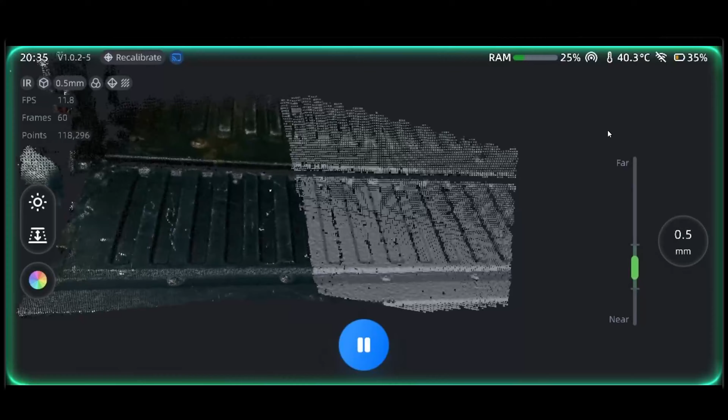Let's do a feature rundown starting with its various modes. The EinScan Rigil can be operated in different ways. Standalone wireless, great for maximum mobility and ease. Utilizing the built-in touchscreen display, you can scan, edit data, and even mesh within a certain data size limit.

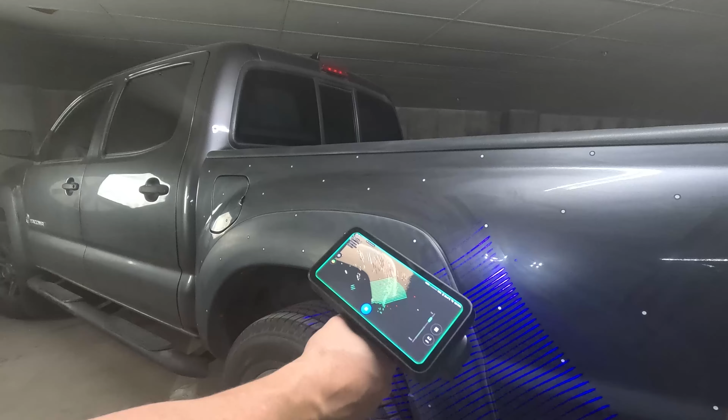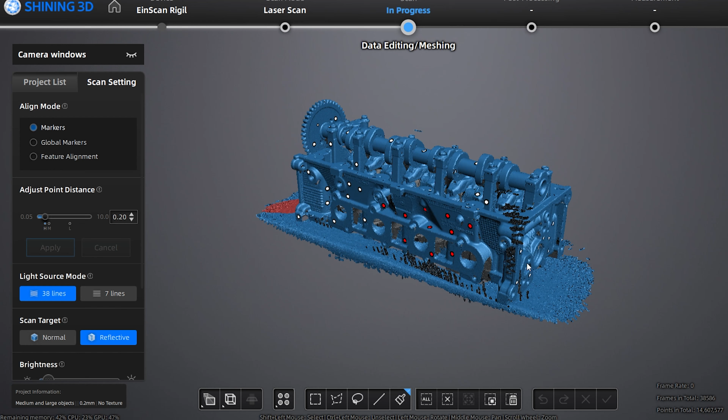For working with bigger and denser data, that's when the scanner's PC-based operation modes come in handy. Wireless PC mode is great for boosting scanning and processing power without sacrificing the freedom of wireless scanning. It leans on the computer's hardware rather than relying solely on the scanner's. In this mode, the scanner is wirelessly connected to the PC over Wi-Fi or a built-in hotspot. It also grants you access to features that aren't available in the standalone mode, such as a greater array of tools for editing data and aligning project groups together.

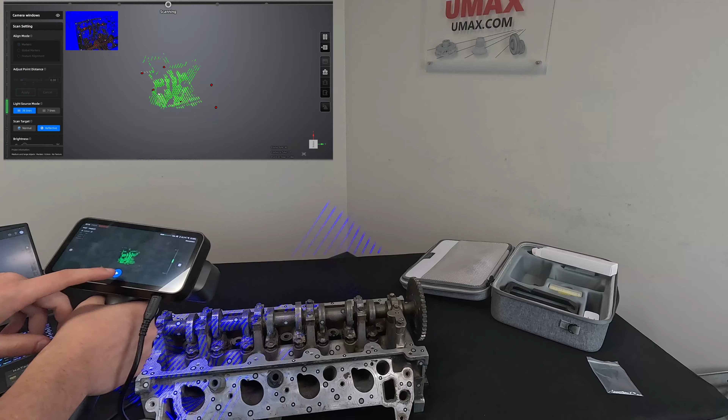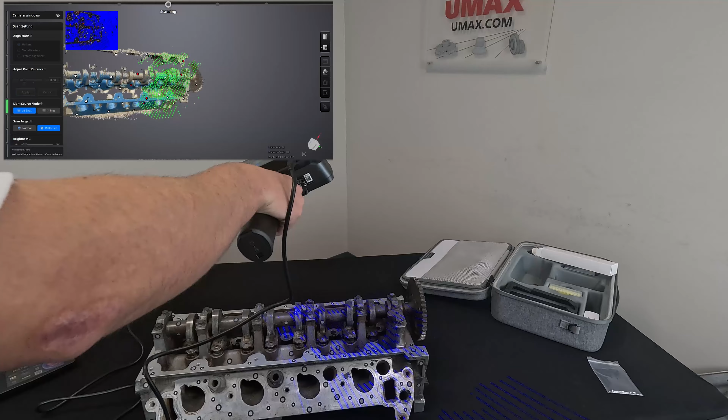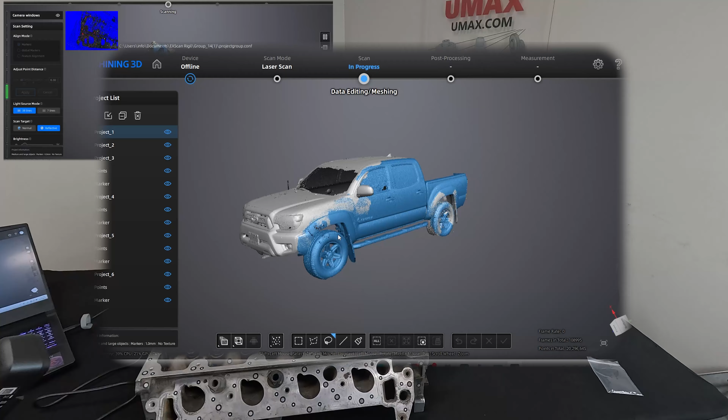Wired PC mode is much the same, but in complicated network environments or ones with high security, connecting wirelessly may not be an option. That's when the wired PC mode comes in clutch. It also boasts the highest scanning speed out of any of the other modes. Any of the scans or meshes generated can be transferred to the PC wired or wirelessly. Your projects can be further modified for alignment, data editing, meshing, post-processing, and of course exported into various file formats such as STL, OBJ, PLY, 3MF, and ASC, all within Shining 3D's included software.

More about the software ecosystem in a bit. We're not done talking about modes just yet. We also have the Rigil's scanning modes.

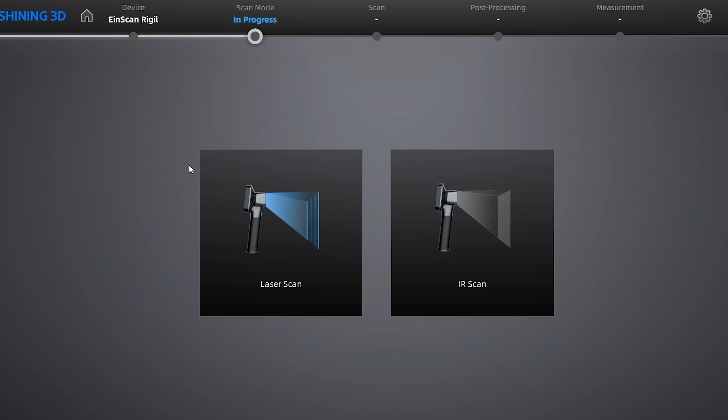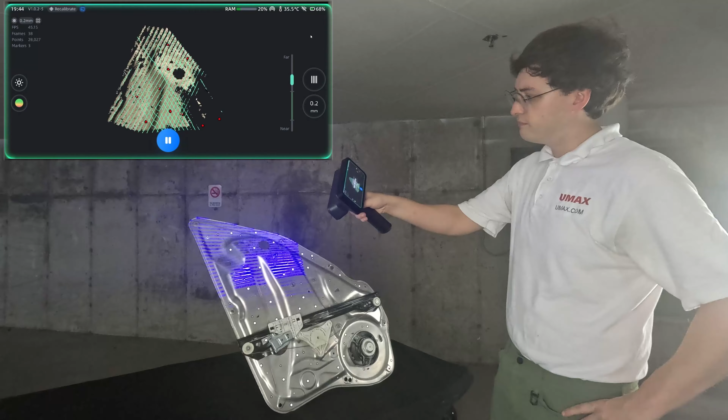As far as scanning technology goes, Rigil has both laser scanning and infrared scanning, allowing for a great degree of versatility. Laser scanning at a blazing 4.4 million points per second, up to a resolution of 0.05 millimeters, with a volumetric accuracy of 0.04 plus or minus 0.06. Even able to do so without markers while in its PC assisted mode, which is quite rare for this type of scanner. This will be your tool for when you need the best quality. It works very smoothly and quickly despite being the mode with the most intense results.

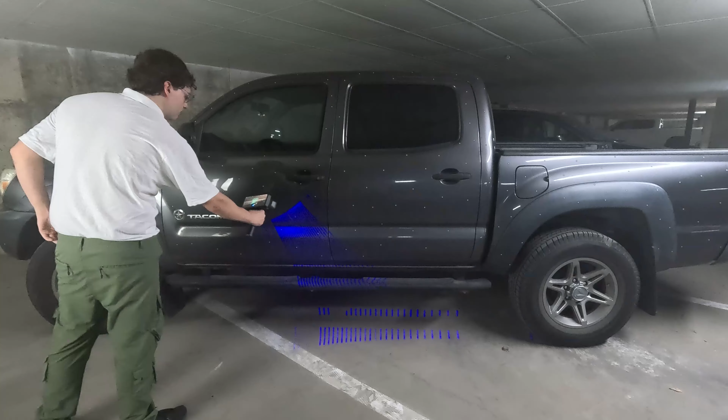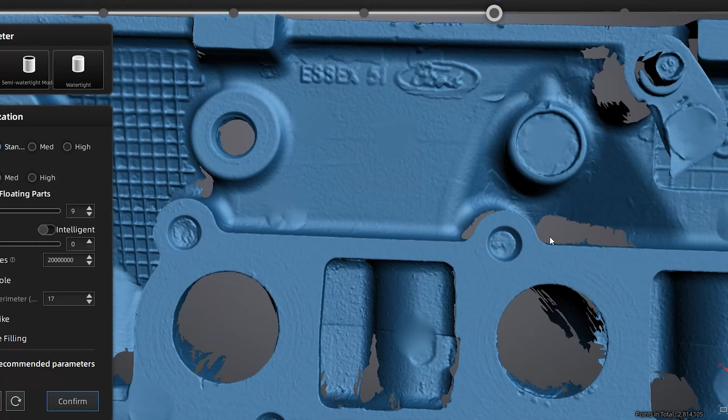It can start to slow down if scanning a very large amount of data in the wireless standalone mode, so I'd recommend splitting the project into groups and aligning them together, or using a powerful PC in tandem with the scanner for no compromises. The lasers are also great for scanning traditionally difficult to scan materials like reflective and black surfaces. I've even managed to scan the lightly tinted windows of my truck. You can also hot switch to a 7-line fine detail mode to get extremely consistent and fine results for a portion of your scan, which is very powerful.

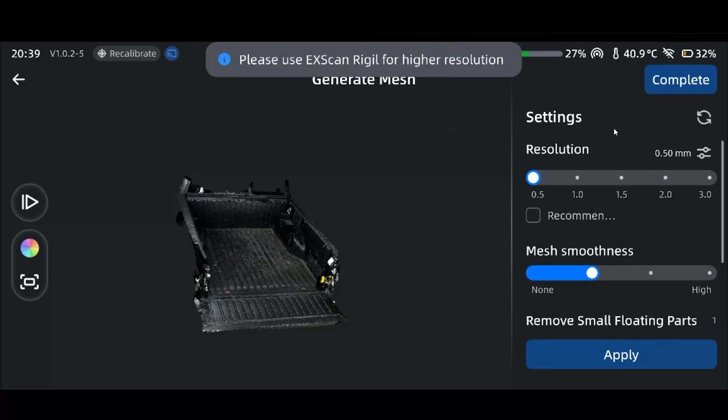So what does the IR mode have to offer if the laser mode is so powerful? Infrared scanning has many advantages over laser, even with less accuracy and points per second. It's capable of full color scanning, not only adding texture to your meshes, but it's able to use it for scanner tracking as well. If you're unfamiliar, this is the way that the scanner aligns itself within virtual space relative to your subject, giving you the capability to scan without the need for either markers or contrasting physical geometry on the subject.

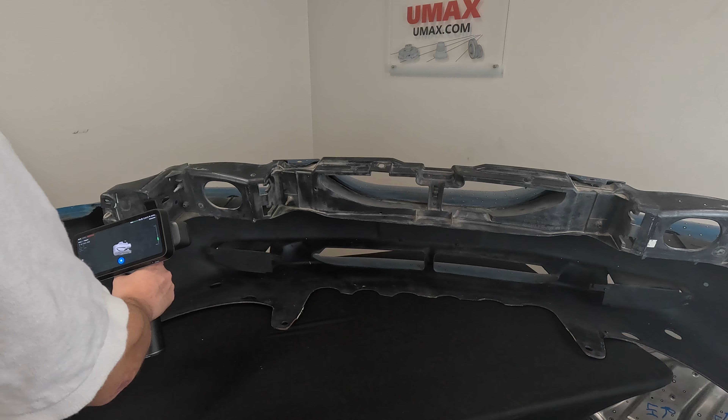This can be very useful for scanning large, smooth objects, which this mode also handles well with its wide capture. Such objects you might be scanning in an outdoor setting, in which case you'll be pleased to hear that the IR mode works great even in direct sunlight.

With IR scanning, you get the option to set the scanner into a portrait mode for optimized scanning of human subjects. Scanning humans can be quite difficult for the subject and the operator because of all the small movements humans tend to make even when they're trying to stay still.

Having a scanner that can get areas done quickly and completely is essential. The Rigil is fast as lightning, and its processing algorithm is great for dealing with small discrepancies and making appropriate corrections.

So what's it like to actually use the scanner? Let's talk a little bit about the user experience. The scanner is very light, it's well balanced, and even after long scanning sessions, my arm doesn't get tired like it does for other heavier scanners. The screen is bright with many adjustable settings, built-in update handling, and a personal hotspot for connecting screens or PCs wirelessly.

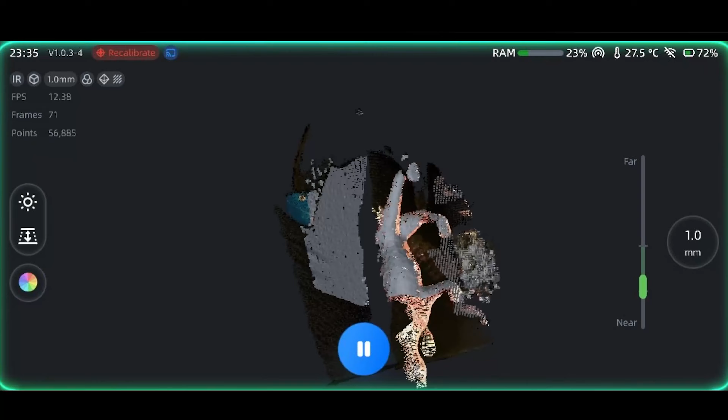3D scanner tracking technology has gotten a lot better over the years, with scanners becoming consistently easier and easier to use, and the Rigil feels like a culmination of that. Sharp angles and quick movements are no problem for a scanner that has a good field of view and an excellent frame rate. There simply aren't a lot of objects this scanner will have difficulty with.

Shining 3D's software environment provides many easy-to-use tools to skip the hassle and tedium that can sometimes accompany the scanning pipeline. Small and large mistakes can be undone without careful data editing or restarting the scan.

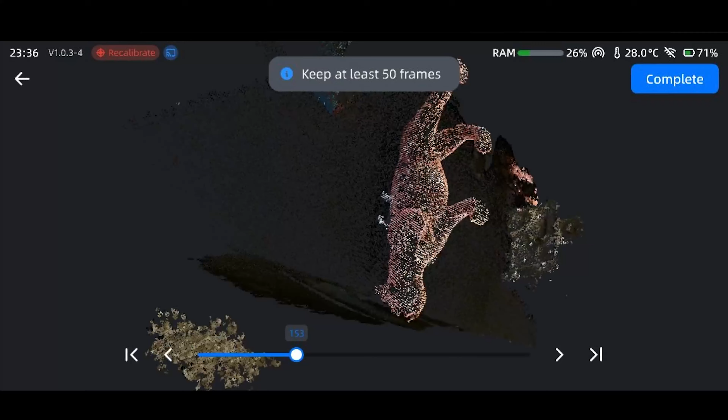By scrubbing through time, you can revert the scan to any previous point. Data editing itself is quick and easy, with small details like a zoomed-in view of the lasso drawing, and connected domain, which lets you select entire connected sections of data instantly. The grouped-based project structure also makes composite scans effortless, and is great for bypassing hardware limitations.

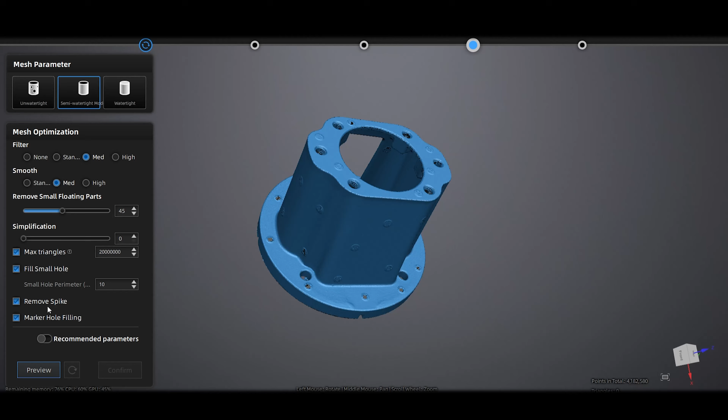After scanning, you'll have access to many different meshing options for simplifying and refinement, with plenty of post-processing tools to further perfect your mesh before export. It even has some measurement tools. Simply put, the software is loaded with features.

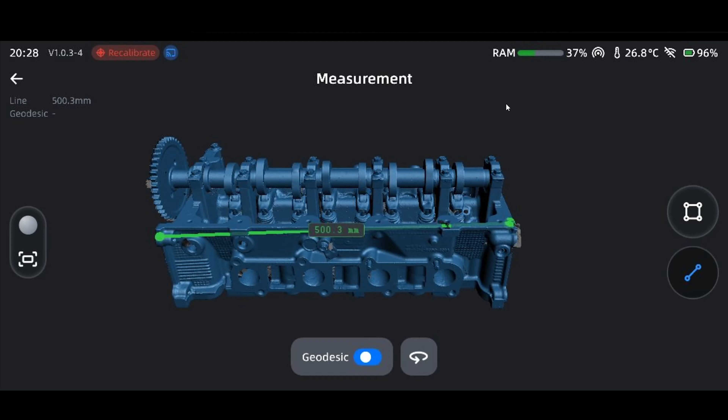I think that 3D scanners can generally be split into three categories: hobbyist scanners, professional level scanners, and metrology grade scanners. I'd put the Rigil right in the middle. Let's compare it to the HX2, a much more expensive scanner, nearly at double the price at time of recording.

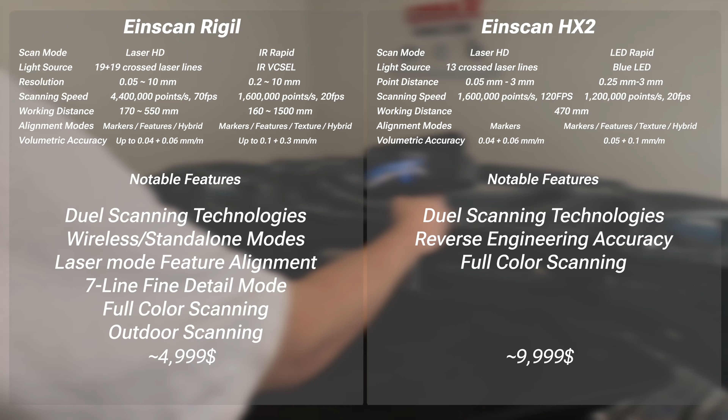You can see that the Rigil steals much of the HX2's magic in terms of features, but it's still outmatched in raw specs, mainly when it comes to their respective non-laser scanning modes, or rapid modes as they are sometimes called. The big thing to look out for in the specs is 'up to'.

The EinScan HX2 is more reverse engineering worthy because it's able to more consistently hit its accuracy numbers. The HX2's laser mode has a higher frame rate, giving it a little bit more smoothness than the Rigil. This all makes the Rigil feel like a wireless version of the HX2, albeit missing some power.

Some might be compelled to compare the Rigil to the much cheaper Vega. Normally I wouldn't, because the Vega is more of a hobbyist scanner, but the Vega, similarly to the Rigil, packs features and specs you wouldn't expect for the price.

Theoretically, I could get much of the same work done, but of course with no real accuracy rating, much lower frame rate, lower scan speed and resolution. You might get the job done, but it would take much longer, you would have to jump through more hoops, and probably wouldn't get the tolerance you need. So it's a massive jump in quality and versatility that justifies the price difference, despite the sheer value proposition of the Vega.

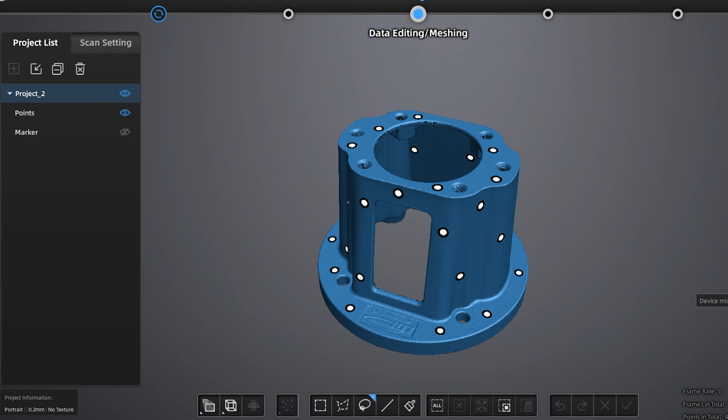In my opinion, the Vega and the Rigil are both shining stars in their respective price points. The EinScan Rigil, though, sets a new benchmark for professional portable 3D scanners, offering unprecedented flexibility, remarkable accuracy, and sophisticated software integration in a compact form factor. It's a scanner that gets all the small things right too, feeling like it's had any possible jank engineered out of it. The results are impressive, and it's a pleasure to use.

And that's all I have to say about the EinScan Rigil.